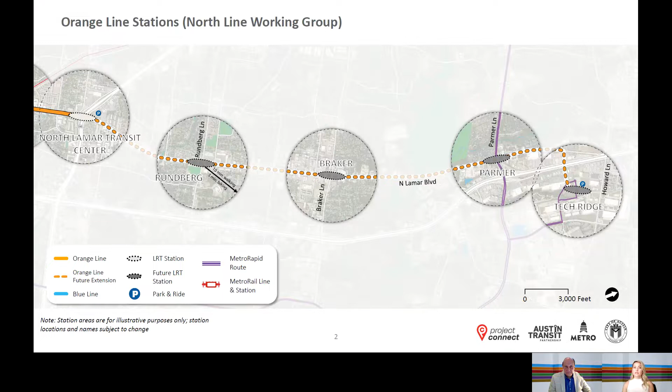After this slide, Javier is going to take over screen sharing and walk you through the engineering schematics for the North Line section. Schematics are a technical tool used by an engineering team to develop the design.

Each page has a legend, but you won't really be able to see the legend while we're zoomed in to the project, so we wanted to walk you through what that looks like. I'll review some of the important items. Just noting that this legend is related to the schematics, not the cross sections on this page. We'll talk through the cross sections as well.

Starting on the top left, you'll see the SB, or southbound, and NB, or northbound, tracks are blue and red solid lines. These tracks stick together, so you'll see them side by side like this throughout.

Right below that, you'll see the existing and proposed ROW, or right-of-way limit, indicated by black and blue dashed lines. This shows you where we might need to allocate additional space for transportation facilities or right-of-way throughout the project. The rest of this side is a little less critical, so we'll move on to the right-hand column.

The top seafoam green color indicates an at-grade or street-level guideway. The sky blue indicates retained cut fill. This color is used to show that the guideway is not at street level, but it's also not fully elevated. We use this to show where we are gaining and decreasing elevation as a result of an aerial guideway segment.

The orange indicates that a guideway is fully aerial or elevated above street level. This purple indicates that the guideway is underground. We won't actually see that in this section.

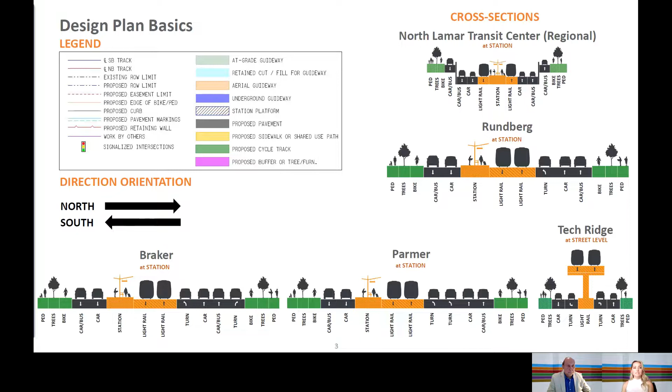With that, I will turn it over to Javier to share the engineering design plans.

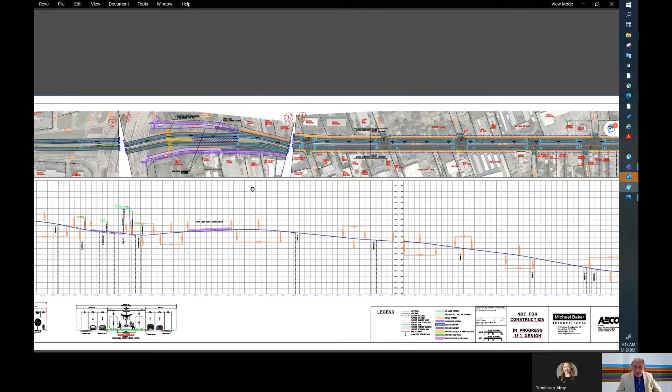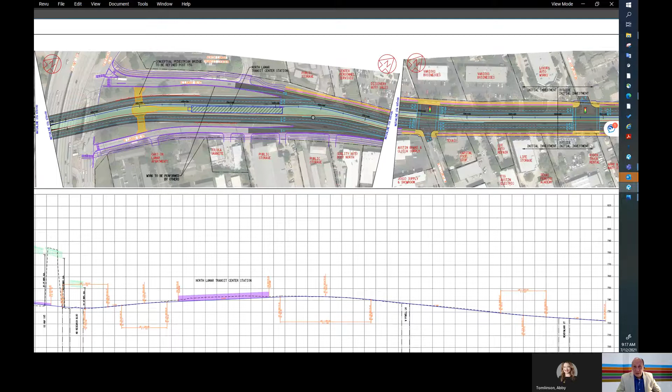I'm going to start by giving you reference to where we are. This is the vicinity of 183 and North Lamar, and this is the North Lamar Transit Center Station, the preliminary and temporary terminus station of the initial investment of the Orange Line. Our North Line really begins at the beginning in the vicinity of Powell Street.

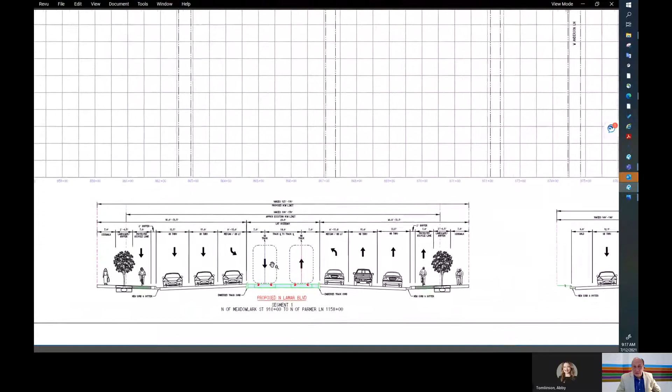Now that you have had the opportunity to find your bearings in this plan, I'm going to show you the proposed section of the new infrastructure that we will have in this corridor. As you can see, we are showing right in the center the proposed light rail infrastructure, which is about 26 to 28 feet right-of-way.

You also see in this section the existing right-of-way from property line to property line, which is about 100 to 130 feet. In some areas, the proposed right-of-way will accommodate the existing vehicular lanes, two in each direction, where left turn movements are required, and other amenities to make this a complete multimodal corridor with bicycle facilities, landscape areas to enhance the visuals of the corridor, and enhanced pedestrian sidewalks.

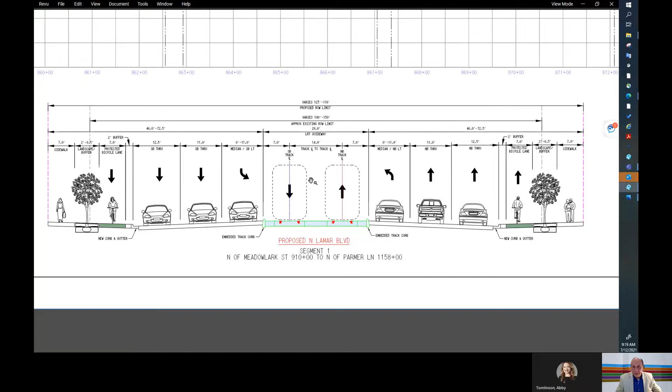We will have these improvements on both sides of the corridor, the northbound and the southbound, with the light rail system in the middle. Now that we've seen the section, I'm going to take you to our plan view so you can begin to see how the design effort is moving forward.

This is our initial part, and to help you understand and follow along, I had divided the North Line into 4 segments. These segments are between the stations, and the first segment is from the North Lamar Transit Center to the Rundberg Station. There are about 5 intersections that will be signalized, and you are seeing those intersections in this image.

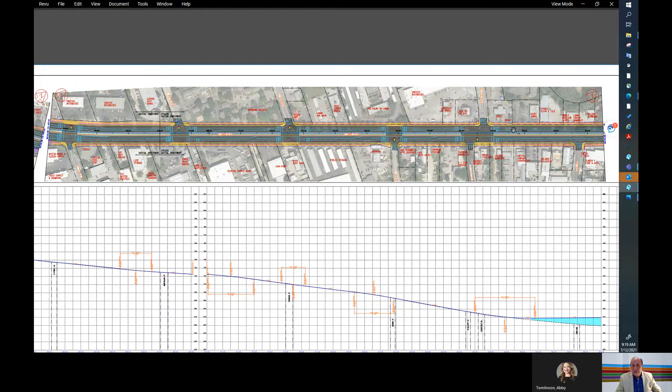Now I'm going to zoom in to show you what to expect in the future design for this corridor. This is a good segment to talk about how the infrastructure is going to be put in place, and also to help you understand a little better the colors that Abby was referring to in her presentation. The yellow portion of this illustration shows the enhancements to pedestrian sidewalks.

The violet purple color indicates enhanced landscape areas and bicycle paths, and the green is also the enhanced landscape areas. In the center of our alignment, in the center of the roadway, you will see the soft green color indicating the right-of-way of the guideway. In this way, you can see we have a blue line and a red line that represent the center of the tracks of the alignment.

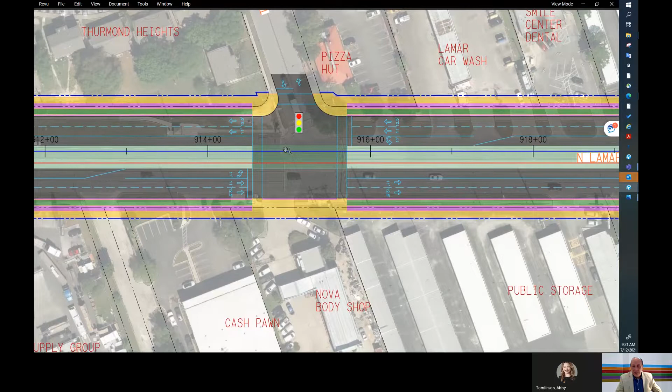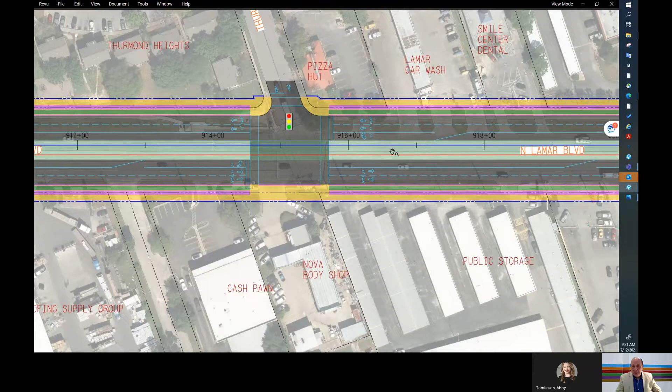At each intersection, depending on the needs and the traffic analysis, we will have the opportunity to accommodate U-turns or left turns, depending on the movements that the engineers decide are needed for each intersection. All of this will be done in coordination with the different entities providing services in this corridor. The design is being coordinated with the City of Austin, the Texas Department of Transportation, and of course the Transit Partnership and Capital Metro. The next segment in our alignment is really the segment that

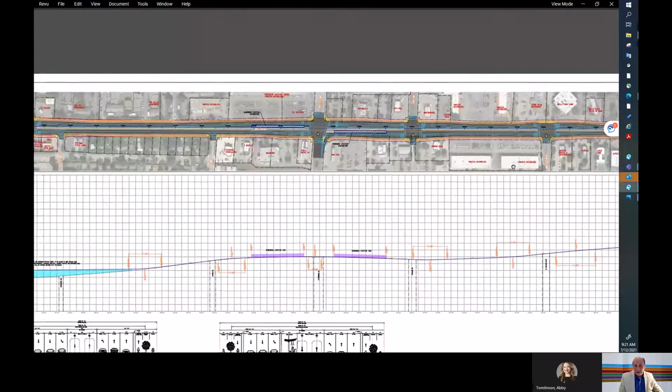gets us to the first station in this north alignment. As I mentioned, we continue traveling north on North Lamar, and

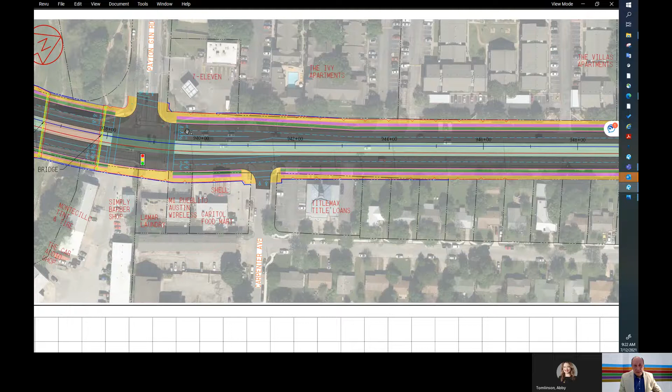we do have some specific challenges that are part of the corridor, and currently we are working to find the best solution. One of those technical challenges, for example, is a creek that we will have to redefine and see how the proposed improvements are impacting other codes and regulations. A lot of design and coordination is going on to ensure this infrastructure is built for longevity, and that everything required regarding all the different codes is being addressed, especially with our watershed department for the City of Austin and other flood requirements that improvements have to address.

So as you can see, the alignment is pretty consistent. When we have intersections that are not signalized, we still provide enhancements to pedestrians.

And we arrive first to our new station, the first station at Rundberg. This station is in the vicinity of a commercial district with elementary schools nearby. This is part of the multicultural diverse corridor represented by several areas of our community. So it's a pretty important opportunity.

In this intersection, we see the station, which is a split platform station with a northbound station located on the north side of the intersection and the southbound on the south side of the intersection. As I mentioned before, there will be enhancements on sidewalks that will allow us to access the platform.

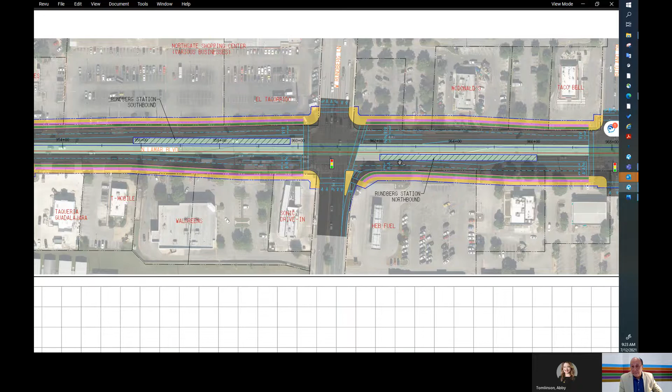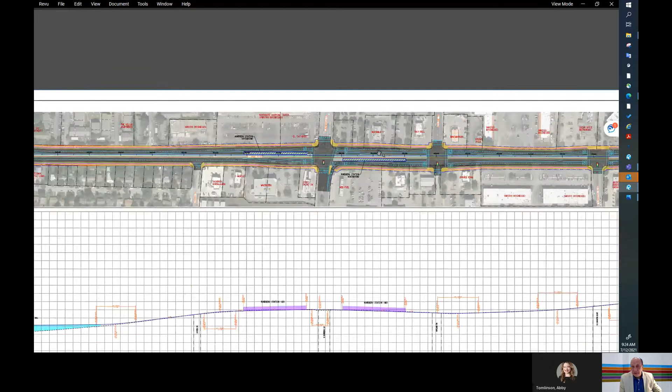As you can see in the corridor, there is an extensive improvement on the sidewalk. So from the platform, people will be able to actually access a lot of the commercial and business destinations that are part of this corridor.

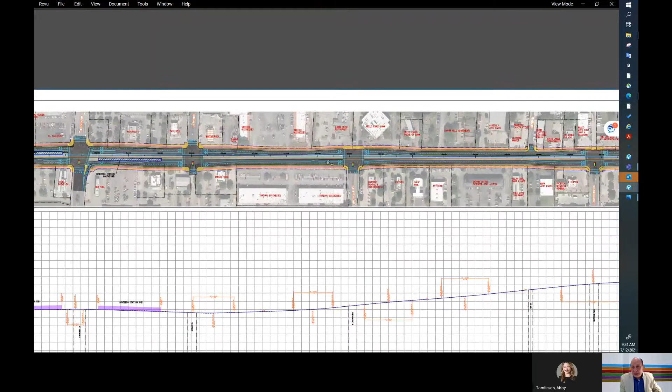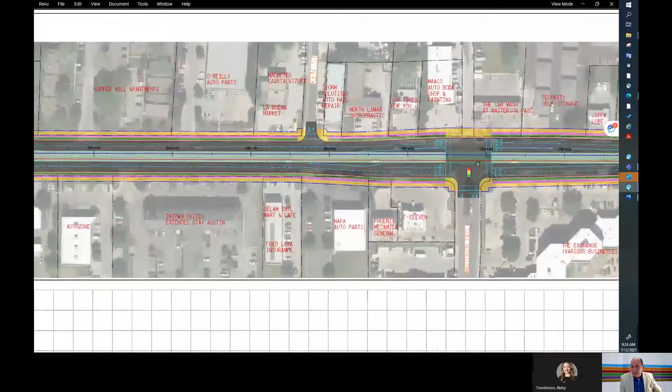Moving forward, our next segment is actually from Rundberg to Braker Lane Station. And again, in this segment, we have several intersections. The alignment really is pretty consistent in the total right-of-way requirements. What is needed, there is a little bit of movement, but basically everything is in order to accommodate the needs of the intersection and enhancement to sidewalks.

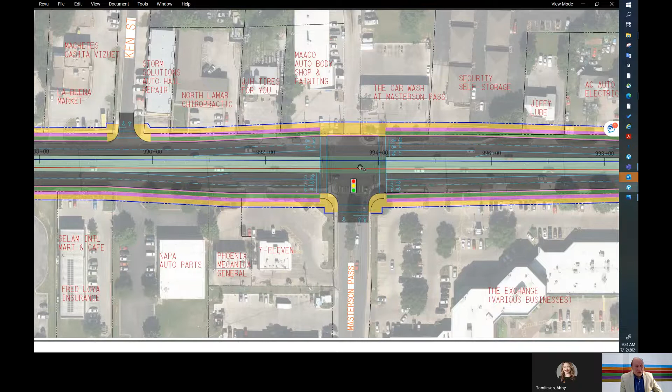This area of the alignment provides access to a diverse representation of our community. There are several multi-family complexes as well in the back of the corridor, single-family residences also. So it's an advanced corridor with the opportunity to generate a lot of ridership for the alignment and provide a lot of service for our community. So as you can see, we continue traveling north.

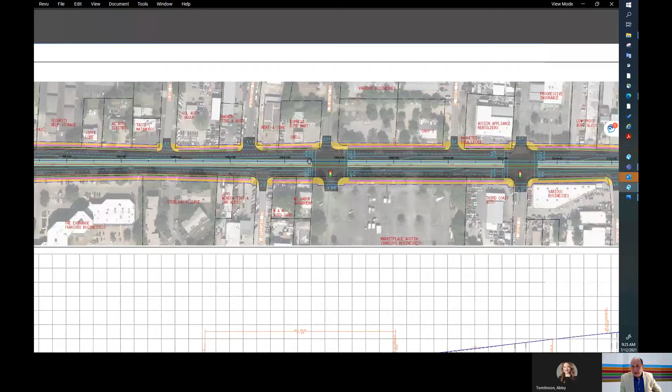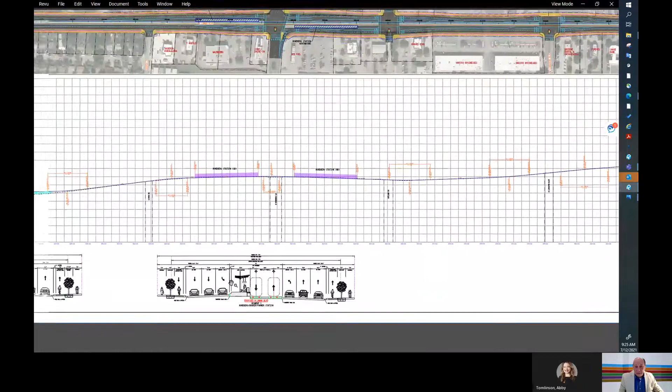Again, this is a pretty large corridor, and pretty quickly I'm going to show you how the section at the proposed station in this area will work. We have in the center the alignment.

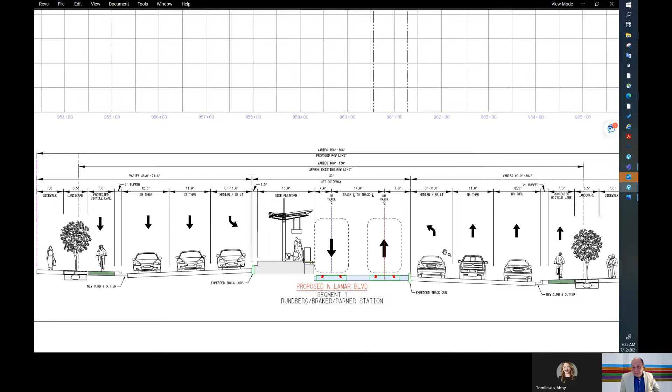We maintain the travel lanes from both directions. We introduce the area for the platform, and we want to maintain again the multimodal purpose corridor, which in this case is the bicycle infrastructure and the pedestrian sidewalks and the landscape infrastructure.

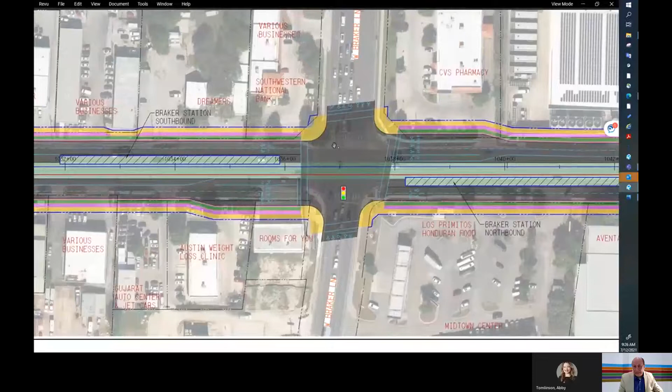Moving to the next sheet in our development, we're now arriving to the Braker Lane area, a very active intersection. This is our second station in our alignment. Similar configuration to the Rundberg station with split platforms, northbound on the north side of the intersection, southbound platform on the south side of the intersection.

And in this intersection, as you can see, and I'm going to zoom in, we are accommodating all the traffic movements. But again, we're making emphasis on the safety of pedestrian movements, and a large investment in enhancing the walking surface to connect to the existing businesses is a priority for the corridor.

Again, in the green area, you see the enhancement to bicycles, and the purple, the landscape, and then the sidewalks. All of this in order to create a better environment for our community and be able to connect them.

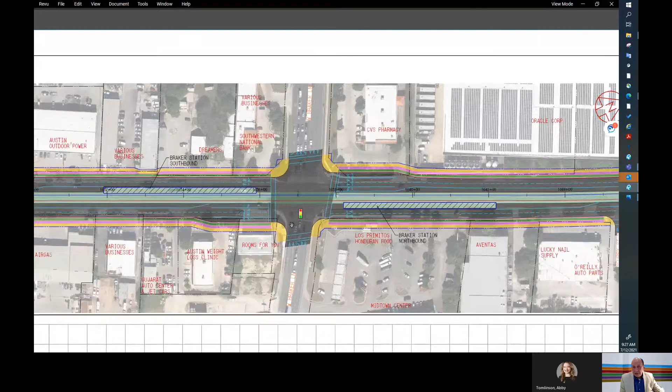There are two elementary schools in this intersection. There are other businesses. This is part of a very strong cultural representation in our community. So the North Line will be providing connectivity to all of these different destinations.

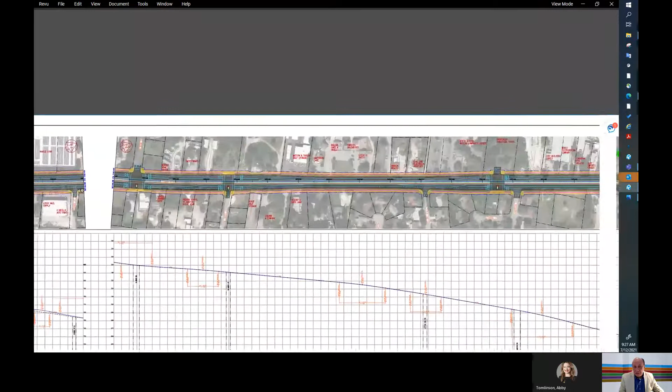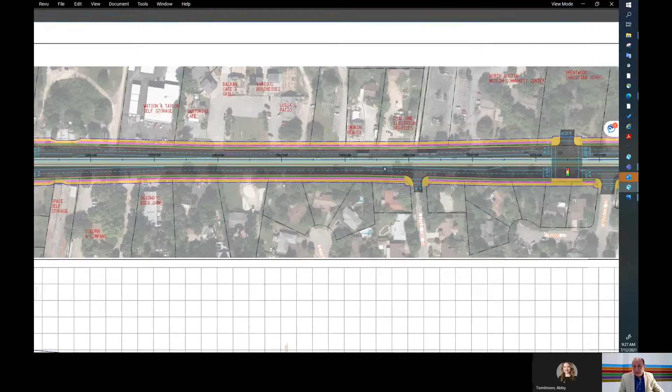Continuing on the alignment, as you can see in the plan view, the section is pretty much consistent. Again, several signalized intersections, but always maintaining 2 travel lanes going in the north direction and 2 travel lanes in the south direction. The corridor is key for very important destinations in this area of the community, and we want to be sure that the sidewalk infrastructure is adequate to allow the connectivity and the bicycle movement throughout the corridor.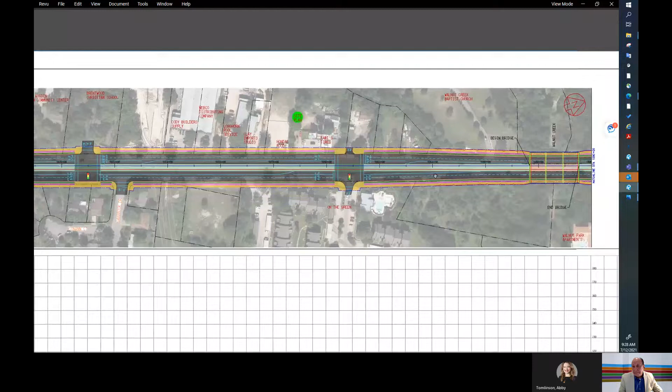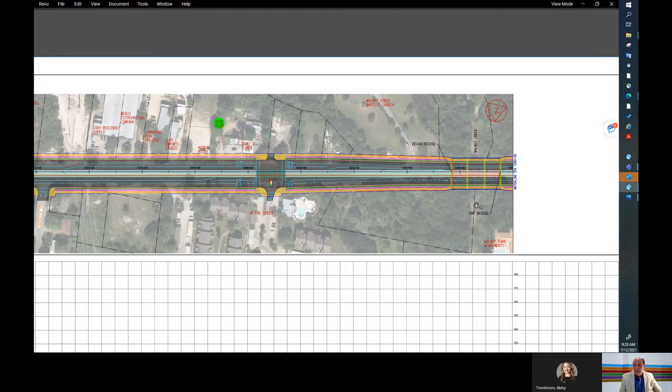We have other areas that are technically a little bit challenging. This is the area of Walnut Creek, where the engineering and design is advancing. Again, just like Little Walnut Creek, a lot of coordination is being done to be sure the flood regulations are being observed, and that the infrastructure being built and the improvements being done to this creek crossing are built for longevity, so the infrastructure is used for many years.

Moving to the next sheet in our design, we're now getting in the vicinity of the Parmer Station, which is the third inline station on this segment. I'm moving a little bit backwards, but this is where we ended in our previous sheet. And as you can see, the section is pretty consistent.

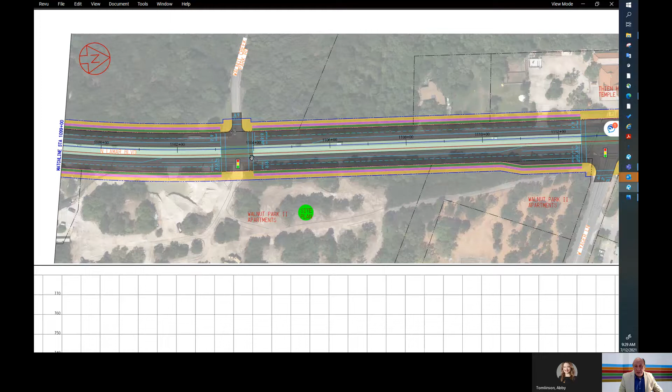Again, the alignment is traveling in the center of the corridor. And again, when we need to provide specific movements in the intersections, we're doing that. This is an example of a signalized intersection.

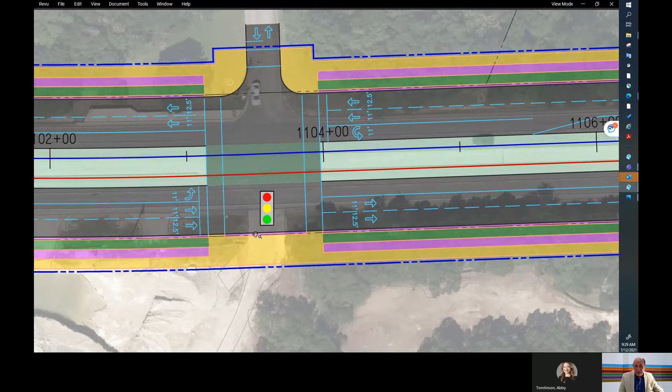When we are providing a U-turn, as you know, many of the secondary intersections will not be able to cross in the opposite direction. That's the reason we are accommodating U-turn movements in some intersections, to facilitate changing direction for the community trying to get to different destinations. So the flexibility of the corridor will continue to be there.

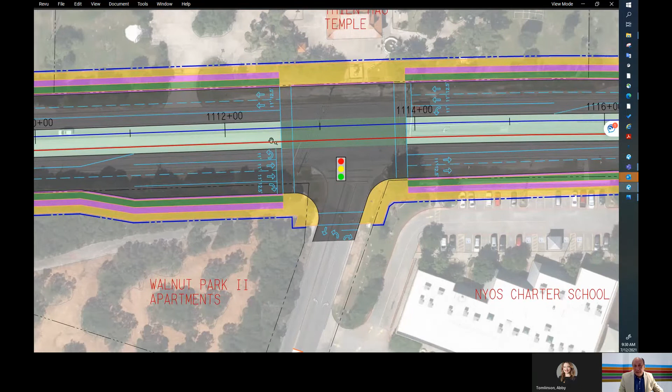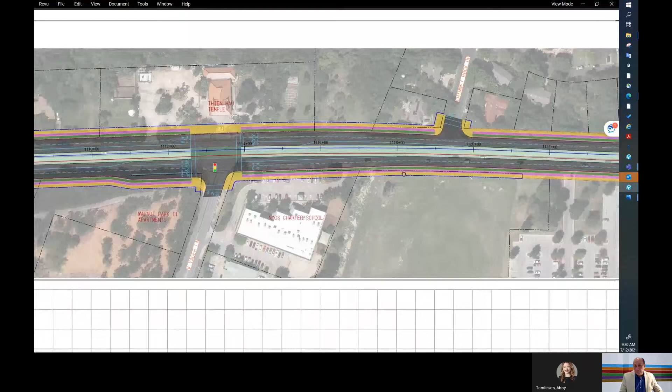Here is another example of an intersection with a U-turn movement, and here we have a left turn to get to the secondary axis. So many aspects of the design are being incorporated. Traffic is one of those, and we want to be sure pedestrian movements are safe, the infrastructure is adequate, as well as the vehicular circulation, and of course the train movements.

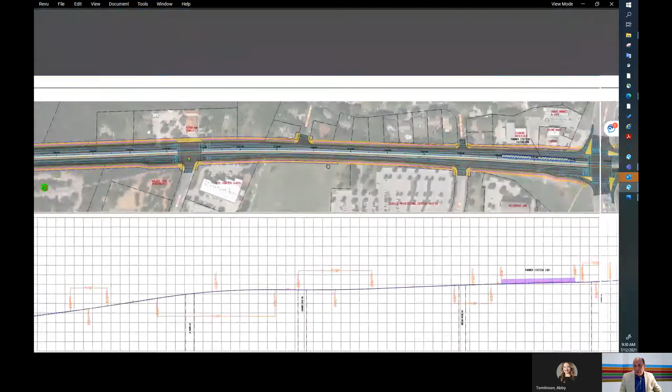We continue traveling north and get to the third station, the Parmer Station. A very busy intersection from the traffic movement standpoint, but again, a very important commercial district.

This station will be serving important destinations like the Thien Hau Temple, which is not too far from Walnut Creek. As you can see, the sidewalk improvements will allow us to create connectivity, not only with pedestrian movement but also with our bicycle facilities, in order to get the right infrastructure so our community can arrive at these important destinations.

Again, we have a split platform at the North Lamar intersection. This is our Parmer Station, with the northbound platform on the north side of the intersection and the southbound platform on the south side.

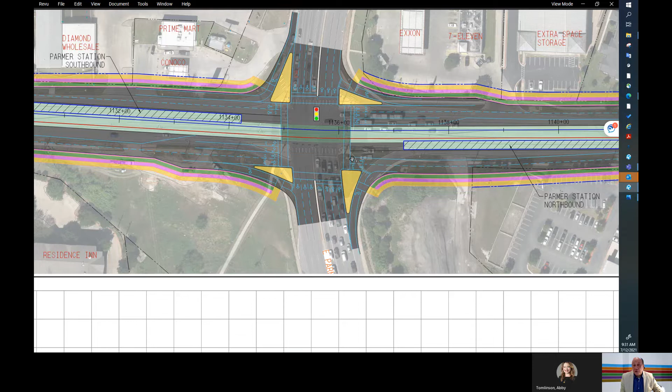We're providing a lot of traffic movements in this area, but as you can see, we're putting emphasis on pedestrian access to the station through these islands. Every pedestrian movement will be signalized and protected so pedestrians can safely cross in each direction of the station and intersection in order to access the platforms.

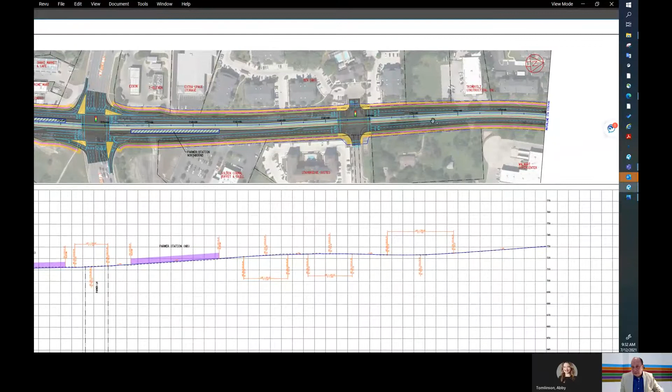Moving forward, getting almost to the end of the corridor, the North Lamar section of the street remains pretty consistent with what the corridor is forecasting to have. I'm moving now to the final sheet.

We have a design element here that is new in this corridor, and we're introducing it to you for the first time in this sheet. The alignment will continue traveling in the center of the corridor, but in the vicinity, almost a quarter mile before getting to the intersection with I-35, near the Marquis Apartments, we are actually elevating the guideway to take it into an aerial configuration.

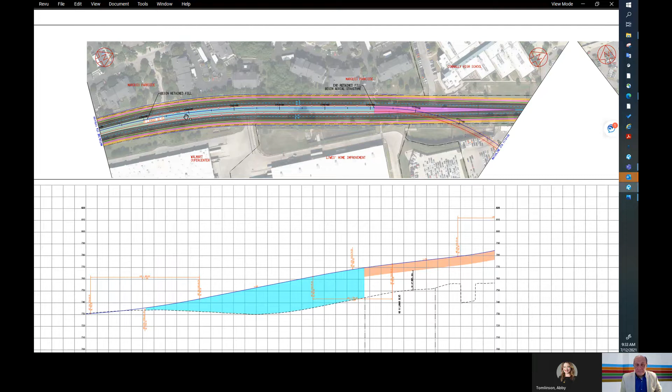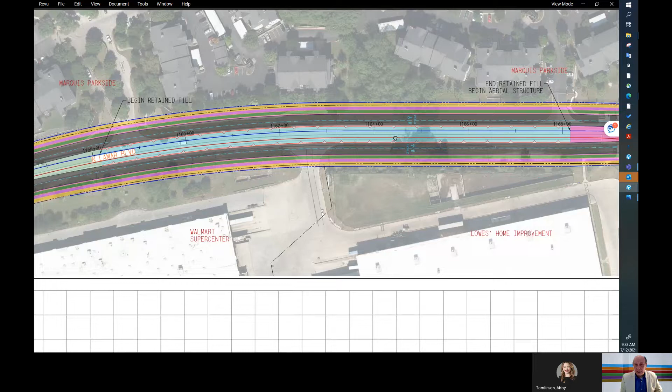The light blue color you see here indicates that the alignment will be transitioning from being at grade into a retained fill, in order to get the elevation and become an aerial alignment.

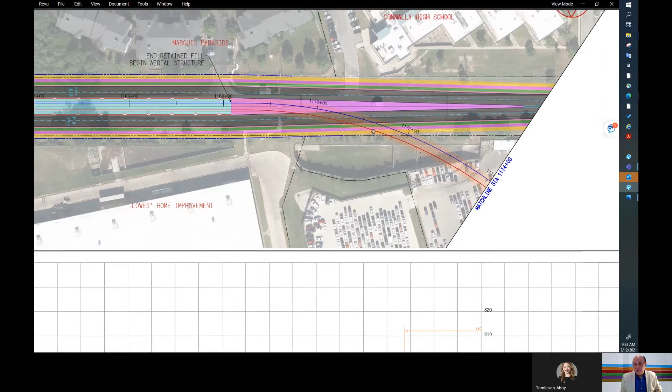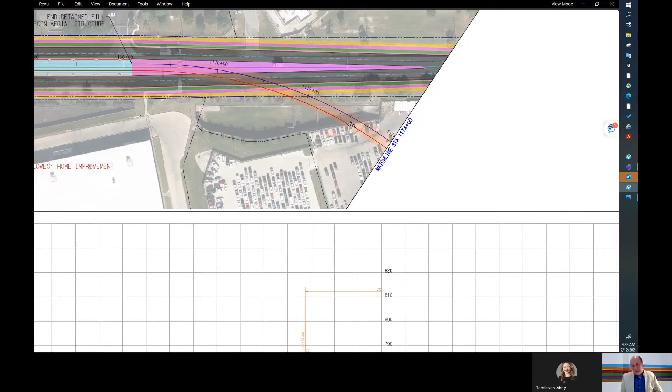You can see the North Lamar travel lanes will be going underneath the alignment. At this point, the alignment is actually an elevated viaduct going over the two travel lanes of North Lamar in the north direction, and taking a turn going over the CarMax facility.

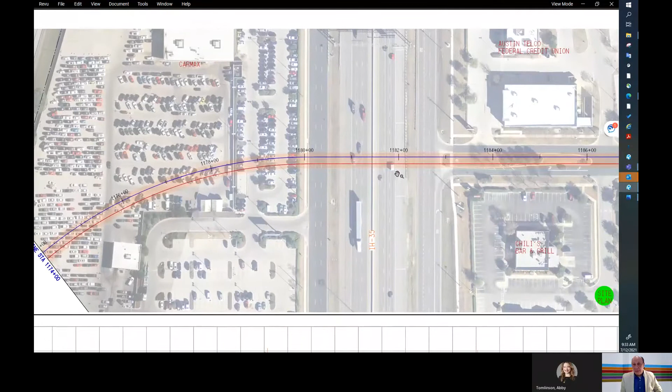You can see here the proposed solution we have today, which we are looking at in order to help us cross I-35 and get us to the North Tech Ridge Park and Ride facility.

We will be arriving, and in this area we will have our terminus station, which right now at 50% design is being contemplated as an aerial station, but it will be connected to the existing Tech Ridge Park and Ride facility. This will become a major multimodal hub for our city in the north part of the city.